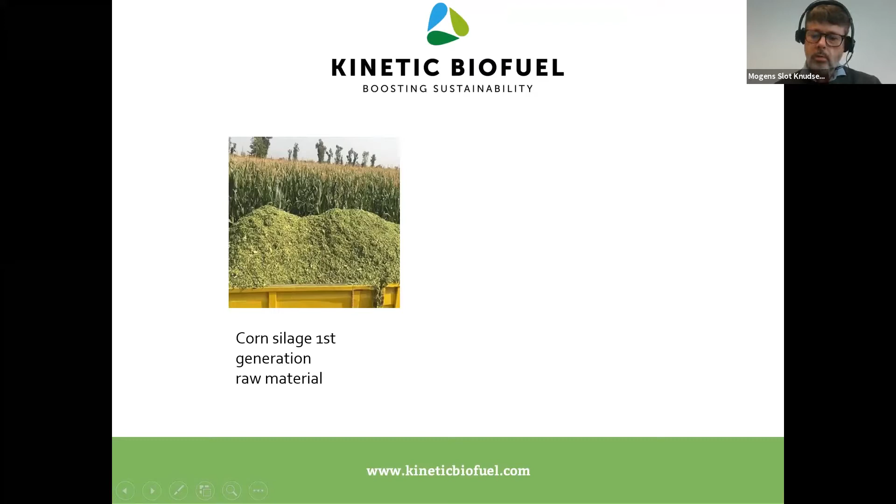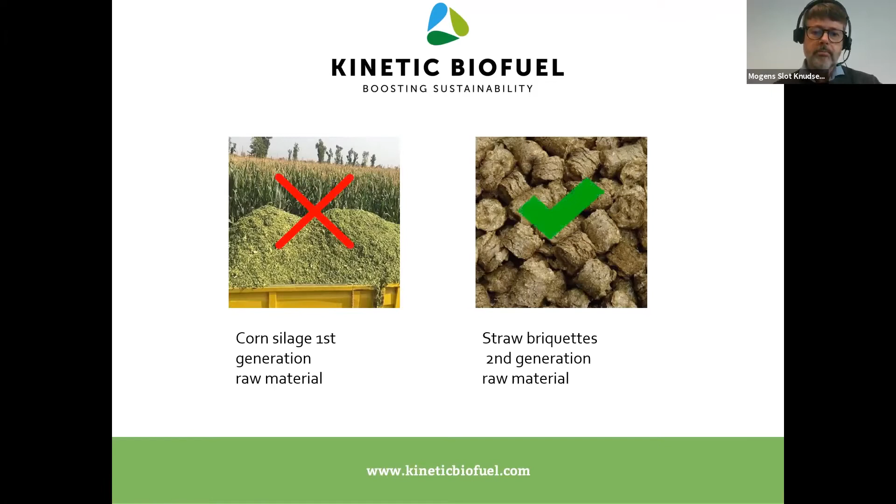So the governments are doing more to find solutions. Our solution is, of course, to use a waste material from wheat straw in the form of briquettes. So consequently, we recommend to switch from corn silage to straw briquettes. Just a little about straw in the beginning here. Everybody knows straw, primarily wheat straw, and for us to operate it, it needs to be in bales.

A bale typically weighs 150 kilos per cubic meter. Shredded straw weighs 60 to 75 kilos per cubic meter. Briquetted straw, then, 400 to 500 kilos per cubic meter. This will give some logistical advantage, which we will touch on later, but it also gives you a very big advantage in relation to your biogas operation, which we will also touch on later here.

These are some of the points we're going through. A little about agricultural residues. Craig told us how much is available in the Far East or in ASEAN countries. There's a lot available in Europe too. Which effects will briquetting have on the straw? What makes this different? And then which yields do we get from the straw? Later on, we turn to how the process is and what costs are involved. And finally, how do we operate this at the biogas plant, and a summary of advantages.

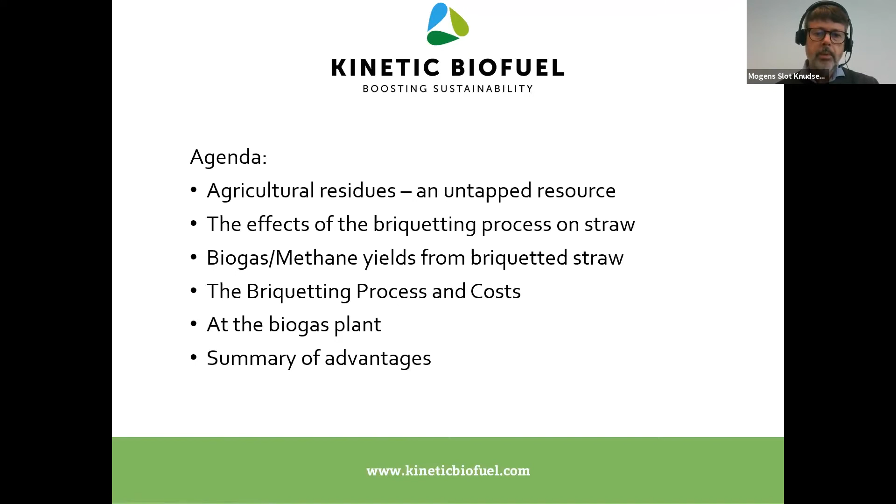Straw is a plentiful resource. Throughout Europe, we find vast quantities of cereal straw and rape straw, and it is simply sitting out there waiting for us to mobilize it and use it for anaerobic digestion, producing biogas, or perhaps advanced biofuels such as cellulosic ethanol or whatnot. The quantity is in one paper estimated at at least 150 million tons annually, and that is a conservative estimate. This is an abundant resource out there. We just need to be able to mobilize it, to manage it, and to digest it.

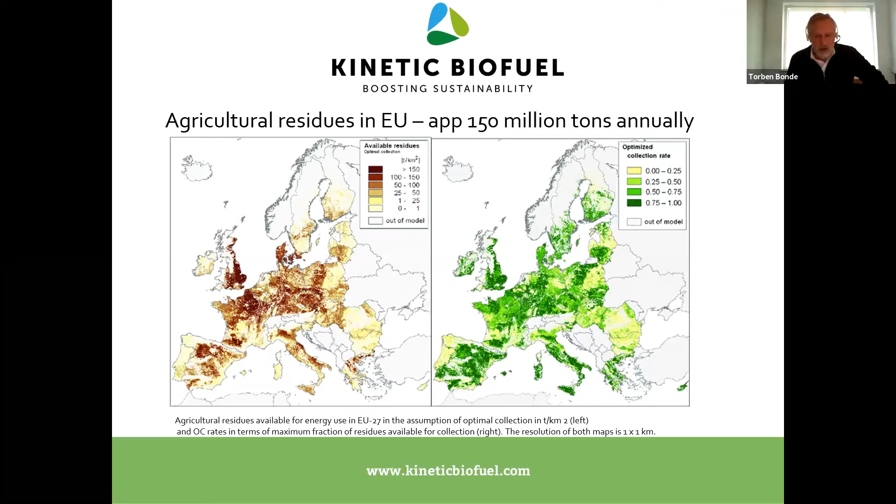Then we can, by utilizing this straw resource, replace all maize silage or energy crops, boost our biogas production and make AD a significant player in the energy market. We can replace virtually all natural gas use in Europe, etc. This resource is available to us now because we introduced this briquetting technology, which is a 3-in-1 solution. It's a logistic solution, a management solution at the biogas plants, and a pre-treatment solution that allows us not only to mobilize the straw, but to benefit from the biofuel potential. So next slide, Mogens, please.

But in order to use it for biofuel, we need to recognize what straw is and how it is constructed. On the scanning electron microscope, you see the very porous structure of straw. Straw is built to stand out in the field and withstand water, pests, bacteria, fungi, enzymes and whatnot. It's built very effectively, allowing the crop to grow in the field. But when we want to convert it to biogas, all those factors work against us. So we need to overcome that fundamental barrier that straw is highly hydrophobic, for instance.

And we do that by our dedicated briquetting technology. After straw passes our process, it is in a split second compressed by means of high pressure, 1,500 bars, and a high temperature development. It is compressed very effectively, exploding all the pores, melting all the waxes, allowing water to penetrate directly into the deep matrix of the straw.

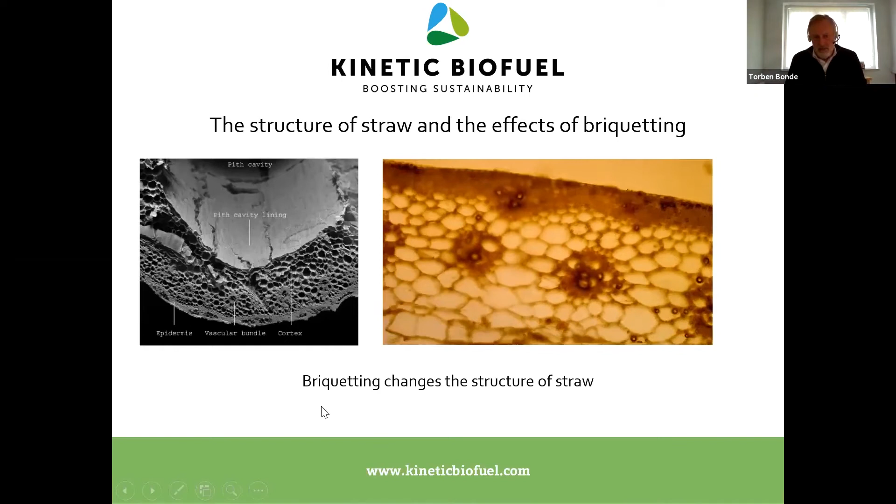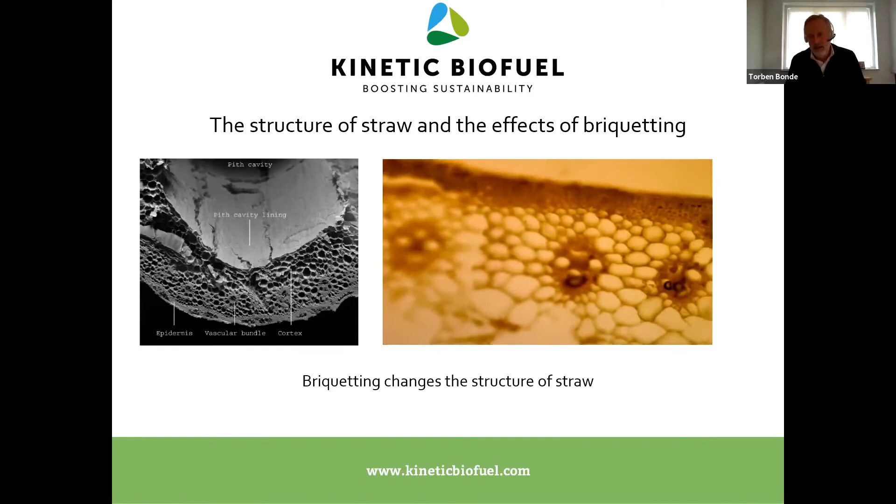We need them to be hydrophilic, as displayed here, because once it absorbs up to 10 times its own weight in water, it has the same density as water, it's easily suspended in the liquid, and it's also very easily digested into biogas. So this is phenomenal. It solves the technical issues of using straw at industrial quantities in biogas plants. The next slide, please.

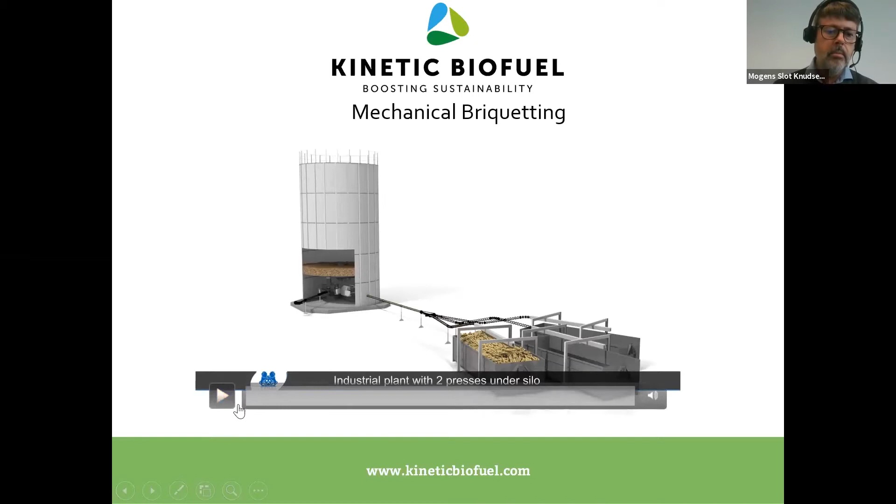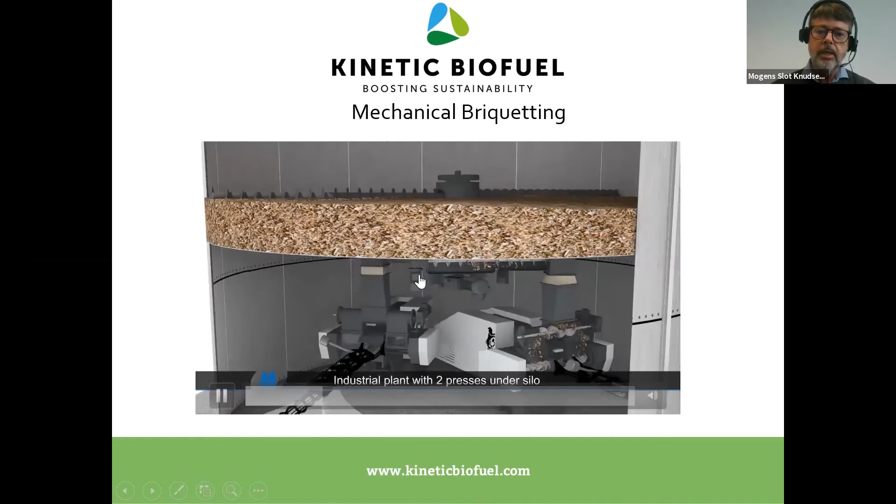Well, here I'll just take over and show you really what's happening inside the briquetting press. If you look at this video here, this is basically with wood, but it's the same principle when you work with straw. You can see the raw material is put into the press and then distributed to two compression slides that bring the raw material in front of a piston that moves about 270 revolutions per minute.

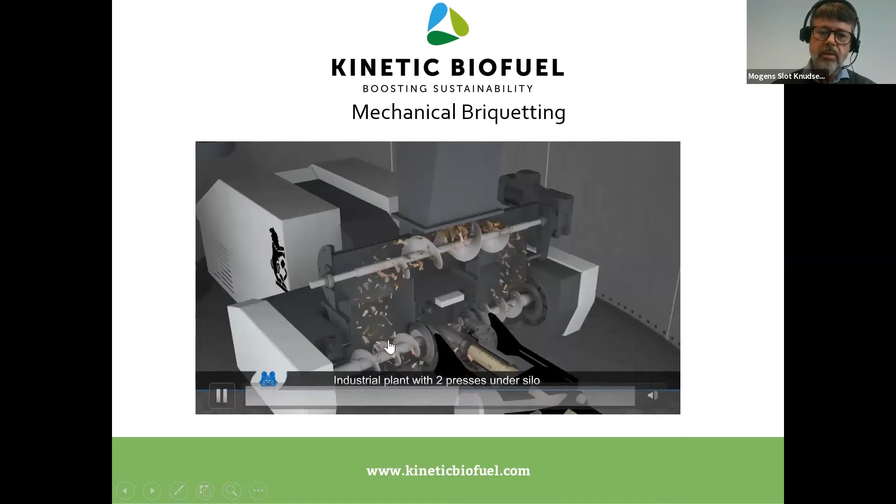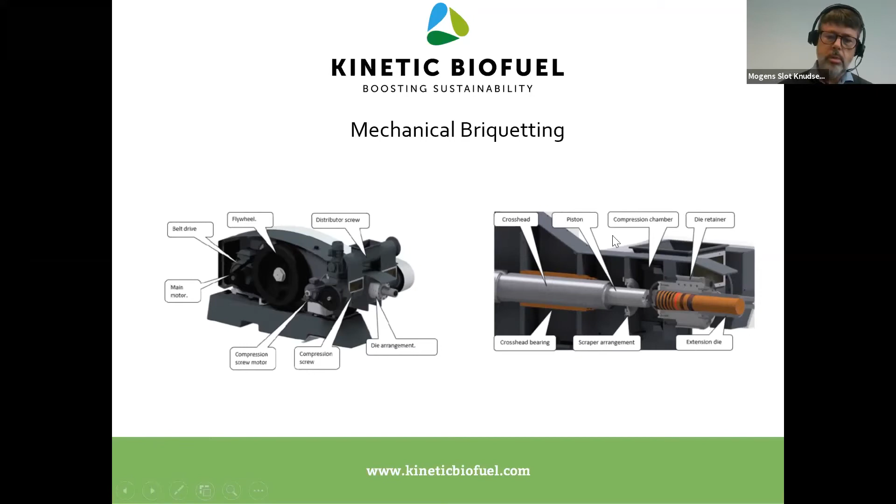This then enters the press, and what happens inside the press is, as Torben mentioned earlier, the straw goes into a conical die system, and the revolutions of the piston create high pressure. And since there's a certain amount of water left in the straw, 12, 15%, you'll get a small steam explosion which destroys the straw. So the mechanical movement, the high pressure and the heat then change the straw. Which again, Torben, maybe you can tell us a little about how this works.

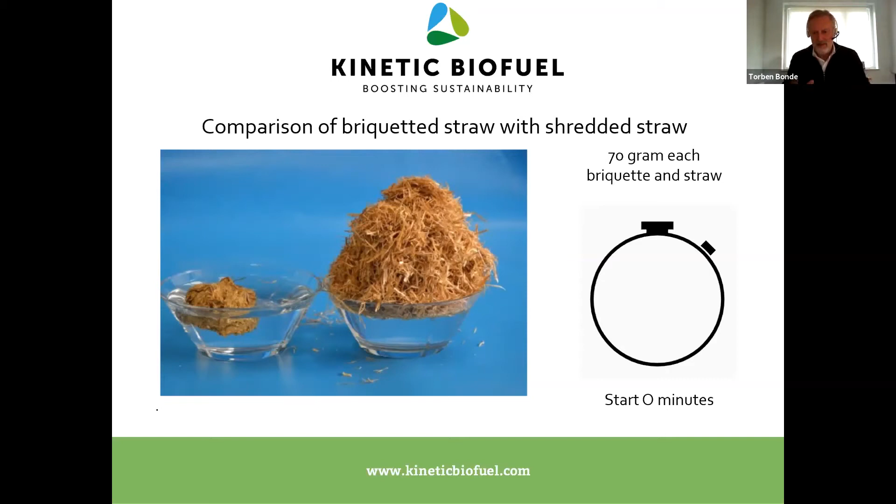This is a very simple setup that illustrates that the briquetted straw has completely changed its properties. When we start this small video, you see 70 grams of briquetted straw on the left hand, and the same quantity, 70 grams of shredded straw, on the right hand, and we just add it into a bowl of water and see what happens. So the next slide. After just 15 minutes, the shredded straw resides on top of the water, not absorbing anything, and the briquetted straw has absorbed all the water in that bowl.

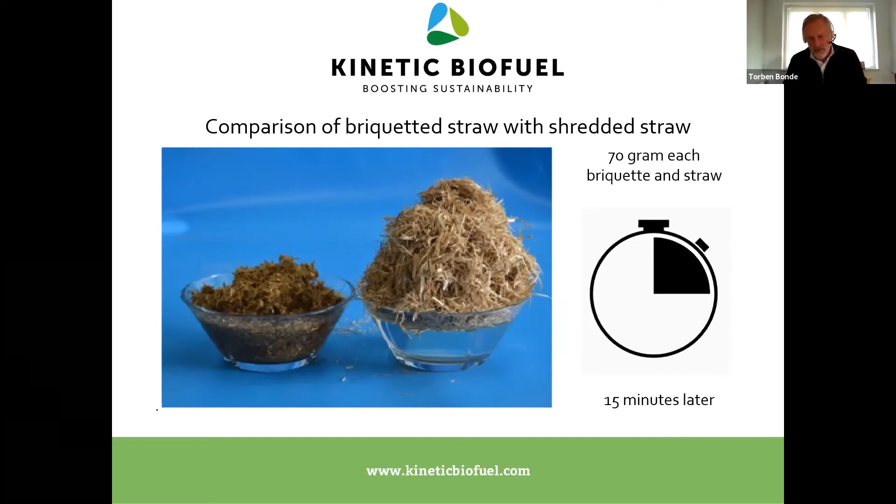And that is exactly what happens in a digester. Once we add the high density briquetted straw directly into a digester, within minutes it absorbs the water, becomes dissolved, and then is digested, giving off lots of methane. So this is simply a wonderful new phenomenon, a new quality that the briquetted straw displays here, which allows us to use straw in vast quantities. The next slide.

If I continue a little bit, in a standard agricultural biogas plant, we generally see a yield of 250 cubic meters methane per ton of briquetted straw. And when we say a standard plant, we generally mean thermophilic temperatures and residence times of about 30 to 40 days. This is not an excessive yield or underestimated. This is a robust average yield per ton of briquetted straw.

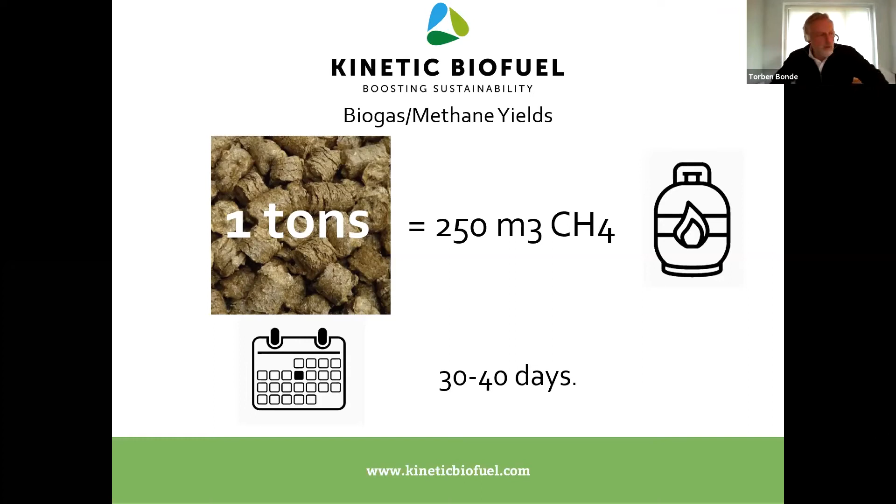In comparison, 1 ton of maize silage would give you approximately 100 or maybe 90 cubic meters methane per ton. That is because 1 ton of maize silage contains about 30-35% dry matter, whereas the straw contains 85-90% dry matter. So 1 ton of briquetted straw almost replaces 3 tons of maize silage. And based on those rough numbers, you can make your business calculation if, under your specific circumstances, briquetted straw would make sense. The next slide, please.

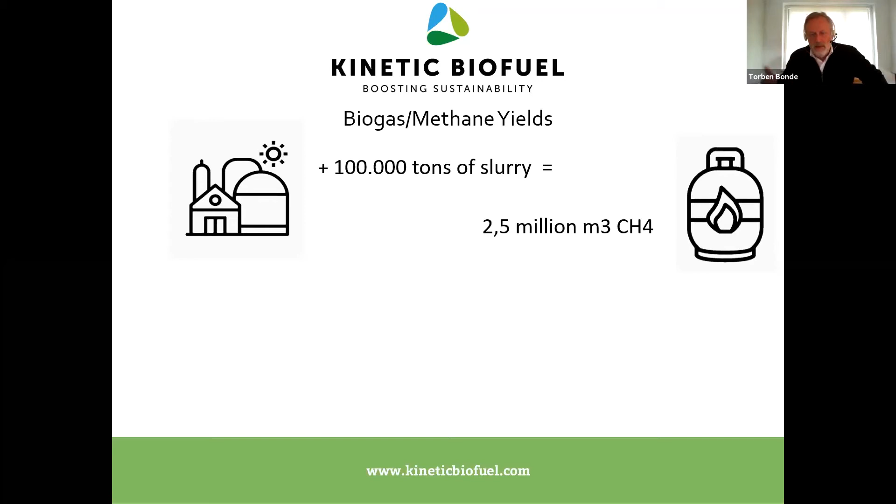This is an illustration of a typical slurry-based biogas plant, maybe 100,000 tons of pig slurry, cattle slurry, whatnot; it maybe gives off an average of 2.5 million cubic meters methane. And you go on, Mogens. And if we just add 10% of briquetted straw, we simply double the output of methane for this agricultural plant. And that is, of course, significant.

But you may not only add 10%, you could potentially add 50% of straw and double 2 or 3 more times. Then you need to do some managing and recirculation of some nutrients. But the simplest version of this is that you just add 10% of briquetted straw relative to the liquid input, and then you will at least double your biogas output, or in this case, it's calculated as methane output.

So, think about it. Sometimes I call it a divine recipe for producing biogas. Farmers have all the dilute pig slurry, cattle slurry, and whatnot, and they are also in possession of the cereal straw. The combination of these 2 substrates is simply perfect. It's a perfect match. The slurry brings in water, nutrients, biological buffer. The straw brings in the dry matter, giving off all the gas, and it works beautifully.

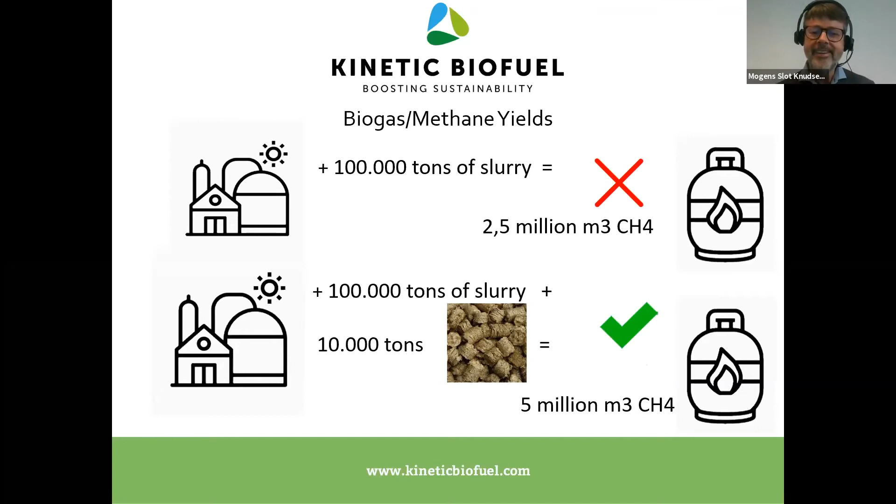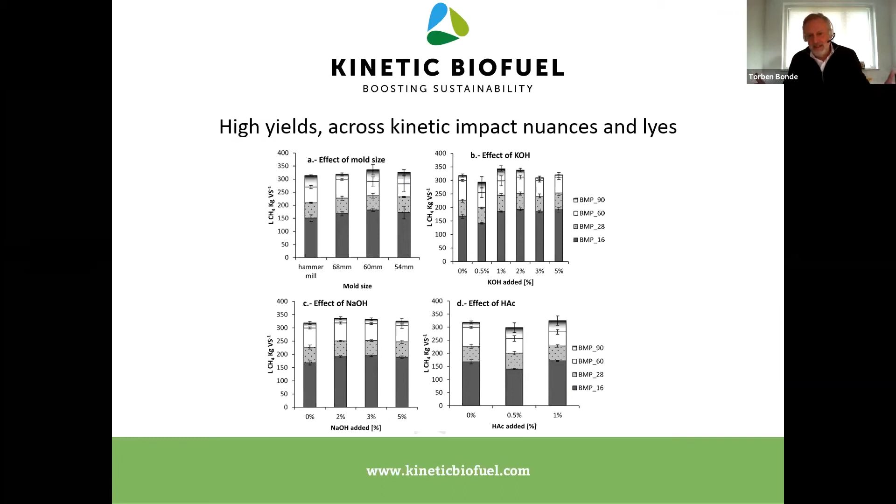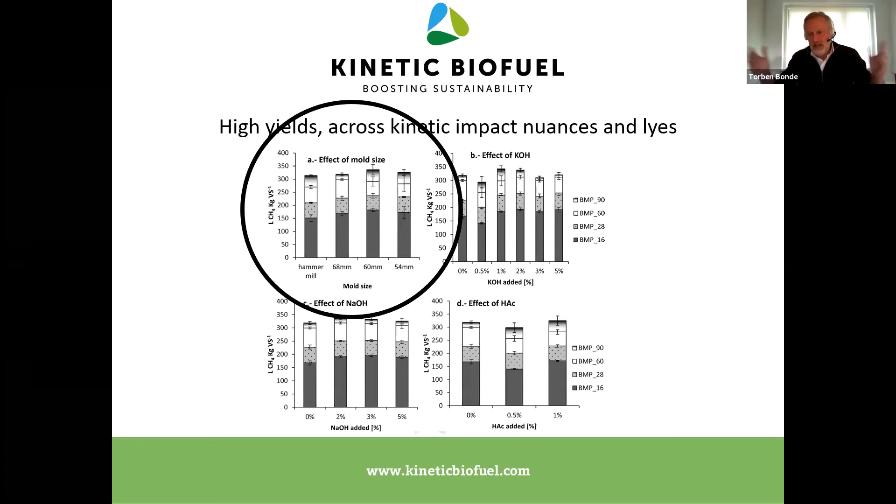When we measure the specific methane yield, we generally do that in laboratory settings. You know, you have a little bottle, then you incubate and whatnot. And when we do all that, and when we test various pressures, etc., we pretty much end up with the same potential of between 300 and 350 liters per kilo volatile solids.

And the variability is very small here, and that's because we work at a very, very high pressure. It's around 1,500 bars. If that pressure is 1,400 bars or 1,600 bars, it really doesn't matter on the outcome. So we have a very robust and simple pre-treatment technology here that allows us not only to solve the logistics and the feeding-in aspects, but at the same time the pre-treatment aspects of the straw.

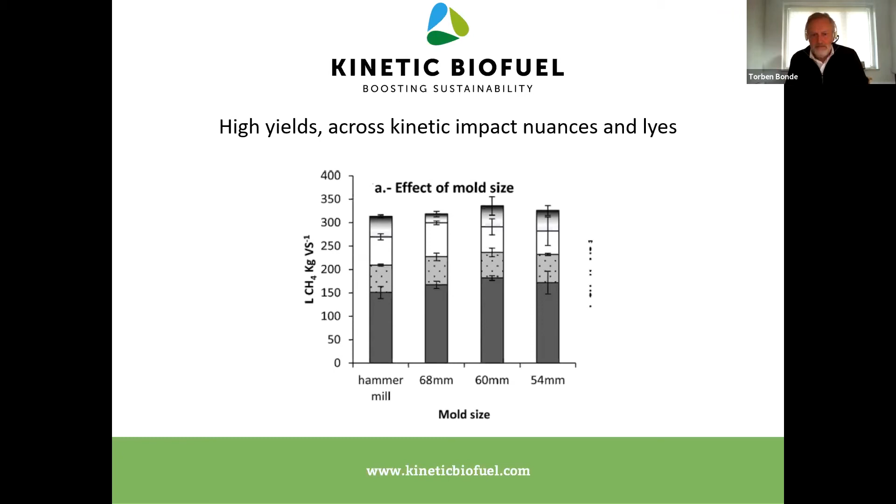So the next slide, please. We have operated all kinds of fermenters, lab scale, semi-scale, and whatnot. One of the highlights is that we operated 2 full-scale reactors completely in parallel, one with cattle manure alone and one with 9% added straw briquettes. In that scenario, we found a doubling of the biogas output and a specific yield of 351 liters methane per kilo volatile solids in this combination of cattle slurry and straw.

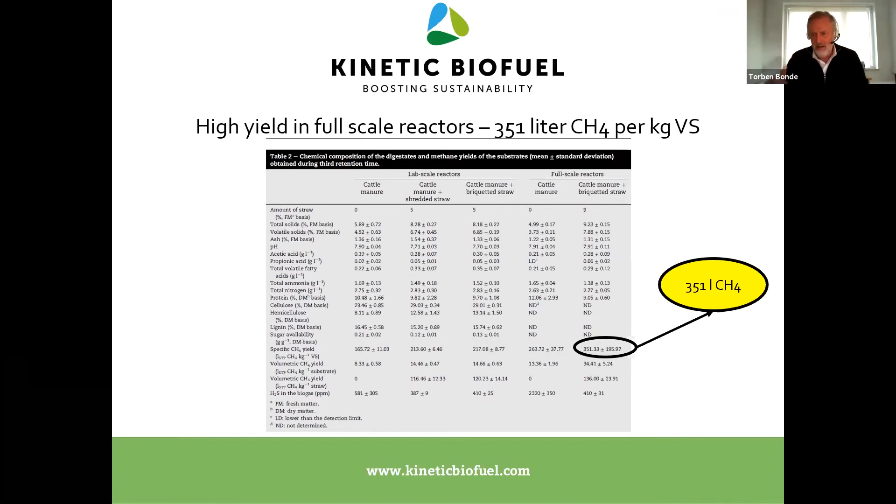So this is a perfect illustration of the potential of co-digesting various manures and other waste with cereal straw briquettes. The next slide, please. So we have talked about the briquetting process and what it brings to the AD industry. By means of this technology, we can mobilize the 150 million tons annually in Europe. We can add 50,000, 100,000 or 500,000 tons to any specific plant producing biogas or cellulosic ethanol or whatnot.

And this pre-treatment is a very important first step in converting the straw to a biofuel. As mentioned, we generally say that you can achieve at least 300 liters methane per kilo volatile solids in a standard agricultural-based digester. But the final biogas yield is very dependent on the specific type of digester you are running. There are several technologies that will increase this yield, and I have indicated some that I work with myself and implement in large industrial plants working on 300 or 400,000 tons of straw.

You can include in your digester setup a hyperthermophilic unit that pre-digests the straw at 70 degrees Celsius, and you will all realize that this temperature is an optimum for the hydrolytic and fermentative bacteria, and that really helps break down the rate-limiting step, which is that the macromolecules need to be broken down to monomers before they can be converted into biogas.

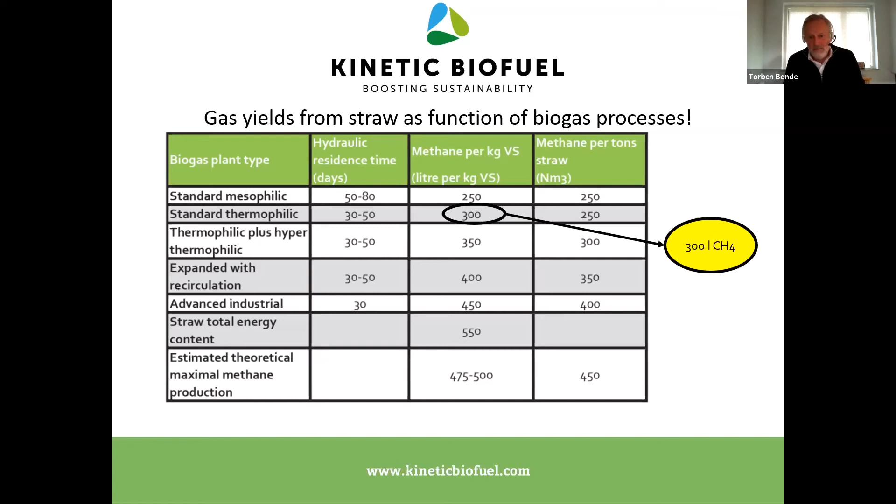The next slide, please. Yeah, and Torben, we have to move a little faster. I think, Leanne, you have to help us if we are running out of time. No, you're still good. You've got another 7 minutes yet. Okay, good. We still have to show you a little video from an existing plant. So.

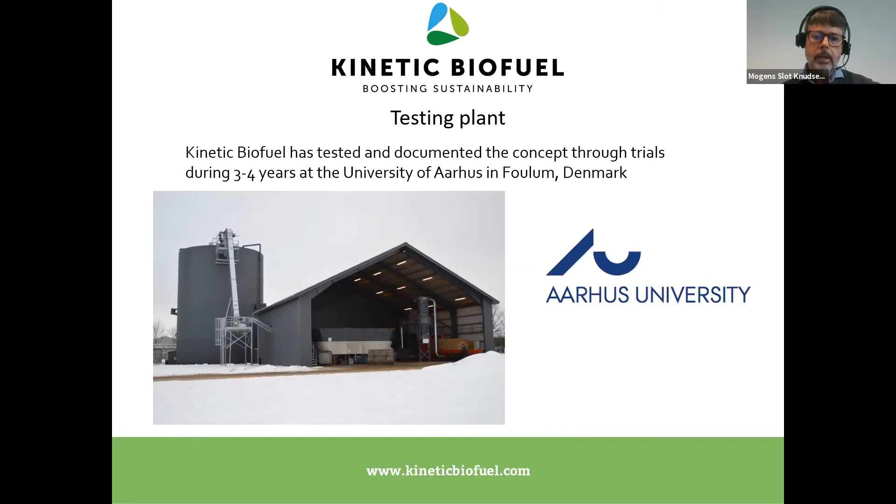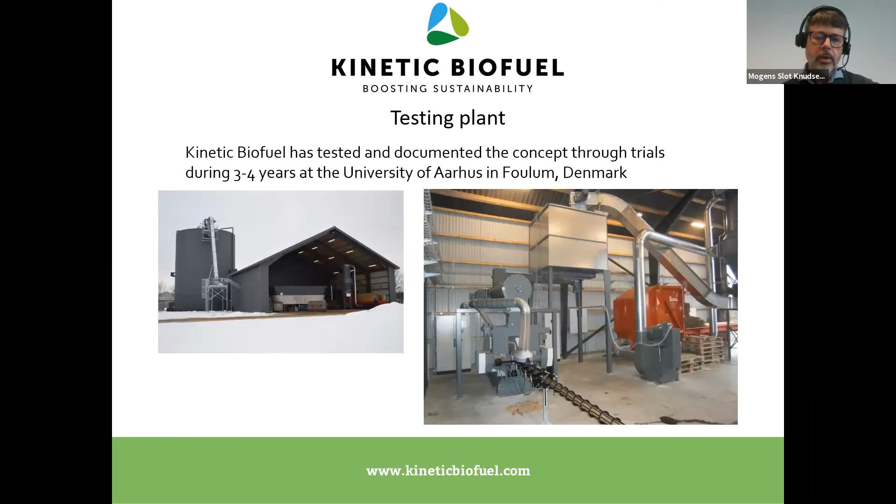Go ahead, Mogens. Yeah, here you see where we have tested this. We tested at the University of Aarhus in Foulum, where they have a reactor, for 3 or 4 years. And here's the plant. I'll show you a larger plant later, but what we did here was an 800 kilos per hour plant, running it for 3 or 4 years.

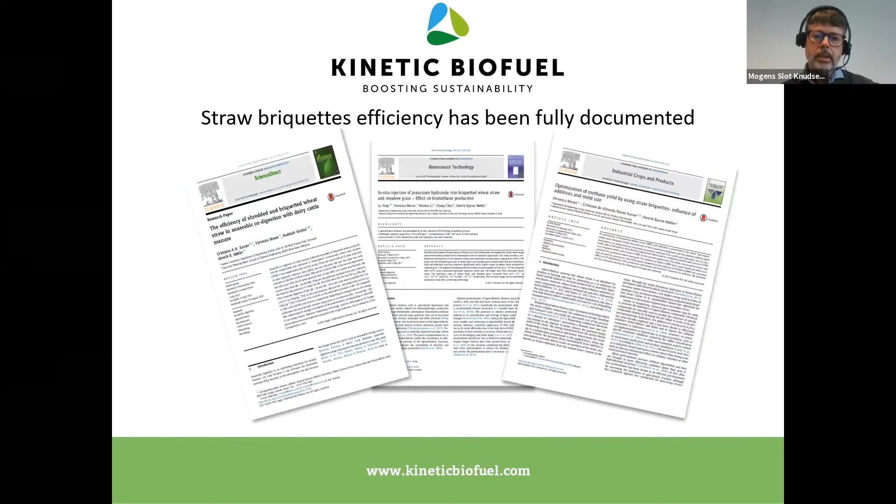All this is documented. Several PhD students and professors have been working on this, and papers are available. Here are some of them. We will not go too much into detail on this. But let's get a little into the process so you understand what it involves. It does not only involve a briquetting press.

What's important using especially wheat straw and other types of straw is the moisture of the straw. This is key to operating a briquetting plant, and it should be around or below 15%. You need to shred, mill, and clean the straw. And here you see a straw shredder where we shred the straw, or take the bales apart, remove the strings, and then most importantly, we remove stones. So we have a stone trap. All bales are full of impurities and many stones.

Afterwards, we enter the hammer mill where we get the straw down to 20 to 30 millimeter length, where it passes through a cyclone filter and into a mixer, kind of a buffer mixer, which is some kind of a silo. You cannot put straw into a normal silo. It has to be moved all the time.

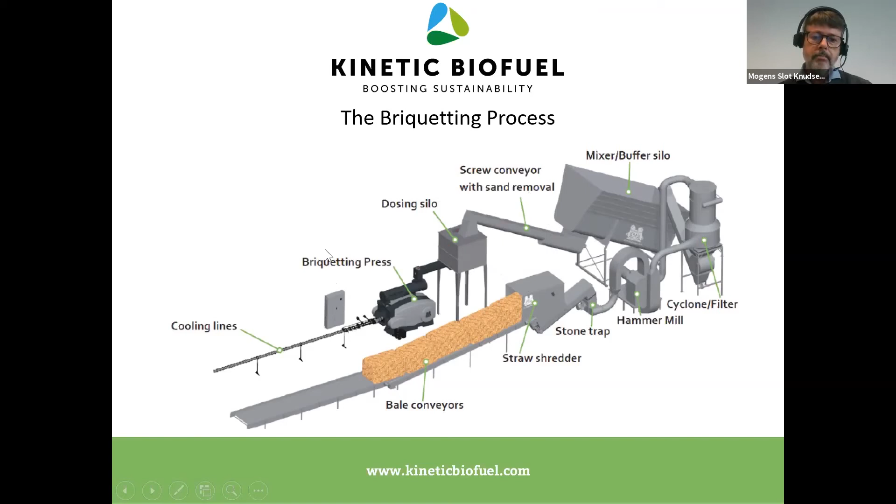If the straw contains sand or small impurities, we can remove that. It's important to remove all these things. Part of them, big particles before the hammer mill, and small particles also before the briquetting press. Sand and stones and so on are high wear on the press, so we prefer not to see that. But this is a typical operation of a straw plant.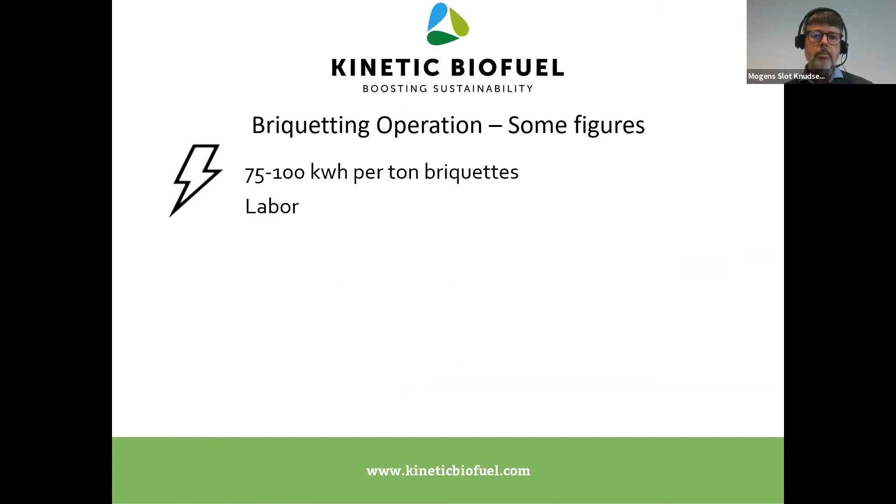Just to give you some figures, the most important thing or cost is power. So we use about 75 to 100 kilowatt hours per ton of briquettes produced. Labor, I write here 1/4 of a person to 1 person per shift. It depends on the size. If you're operating 5 presses, you don't need much more people than operating 1.

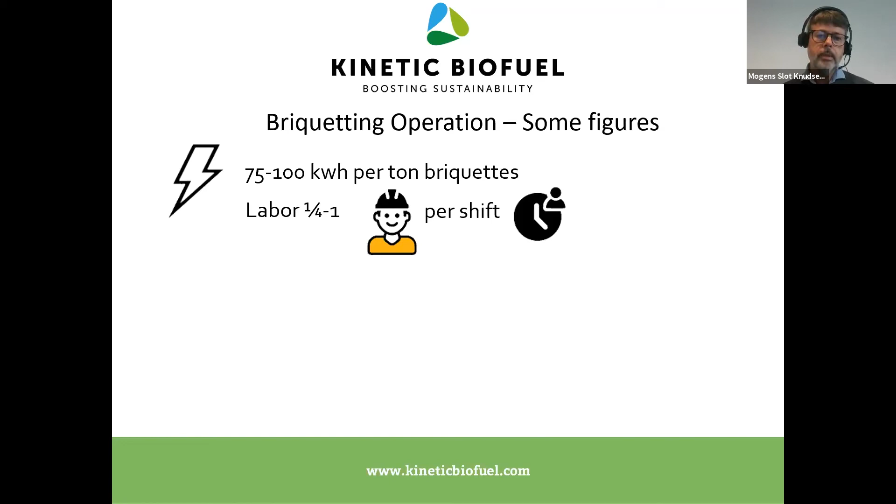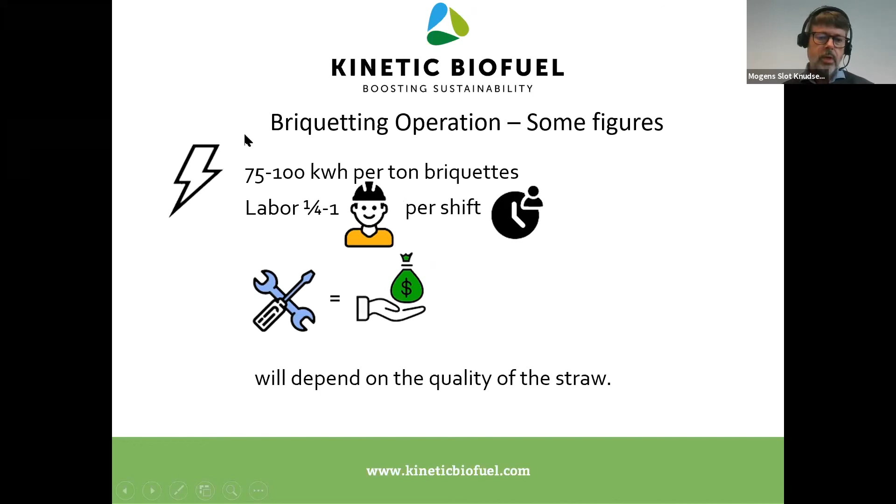Maintenance costs, spare parts are of course an item which will depend on the quality of the straw. If the straw is clean, then the whole operation, depending on the cost of local labor and power, will be about 25 to 30 euro per ton.

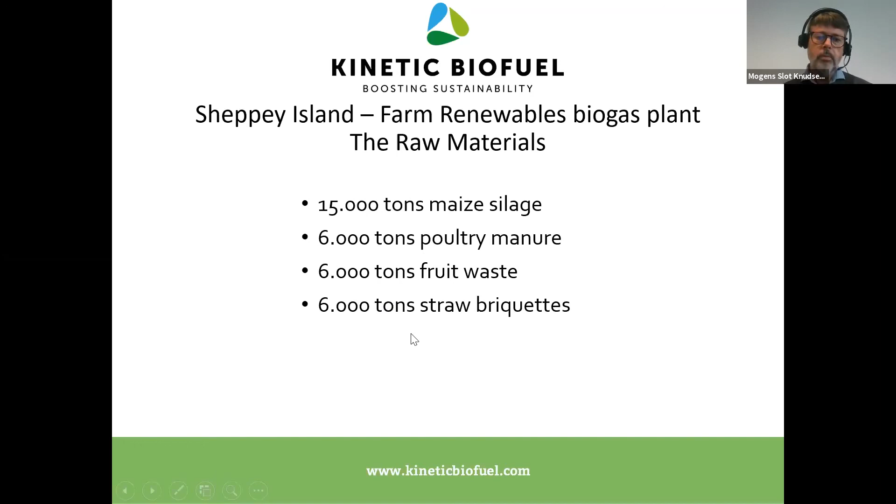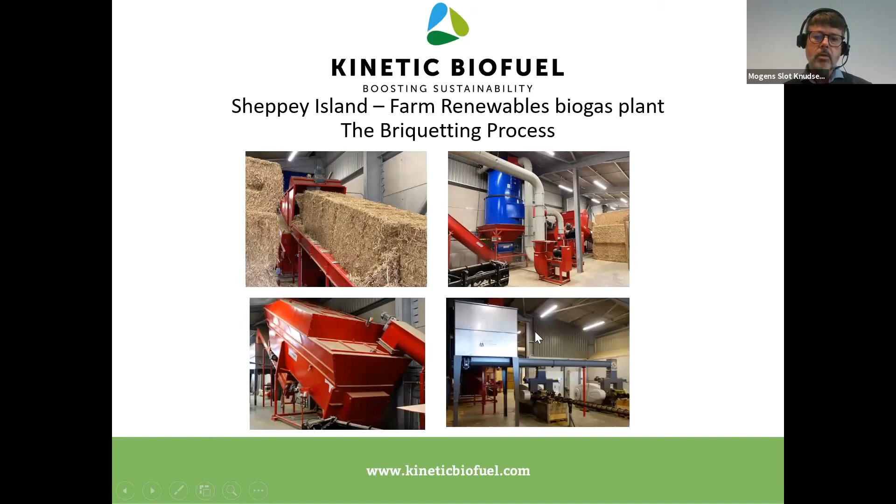We'll show you an example from the island of Sheppey, where we have installed a briquetting plant together with a new biogas plant. This plant uses 15,000 ton of silage, 6,000 ton of poultry manure, 6,000 ton of fruit waste, and then 6,000 ton of straw briquettes. Of course, the straw briquettes have a lot higher dry value or volume than some of the other parts. Some pictures, shredding operation, filter, mixer, and so on, but I think it's better for you to see this on a video. So we should be able to show that here.

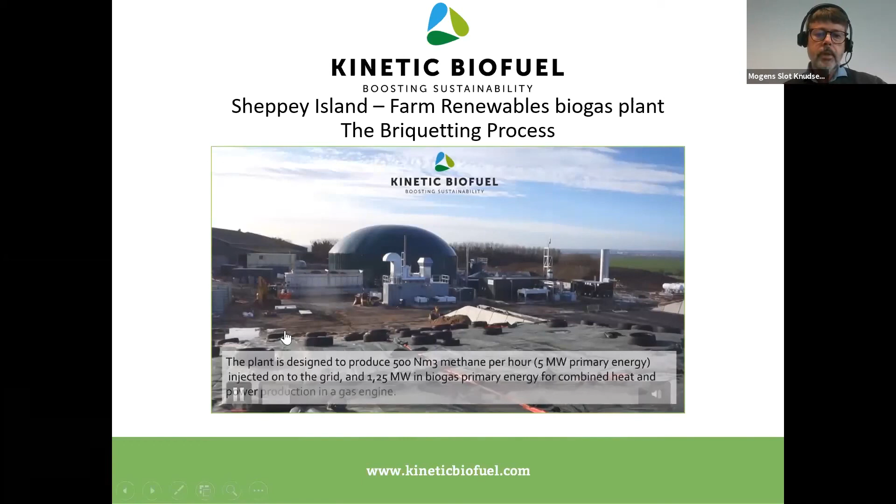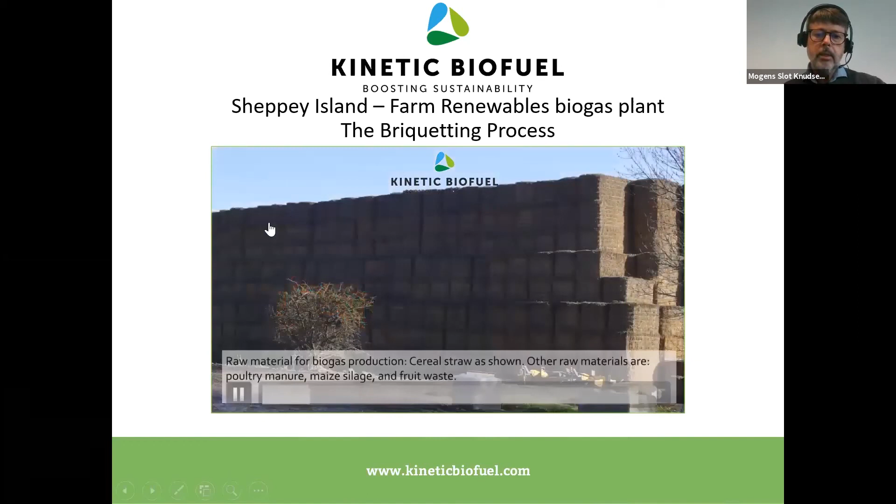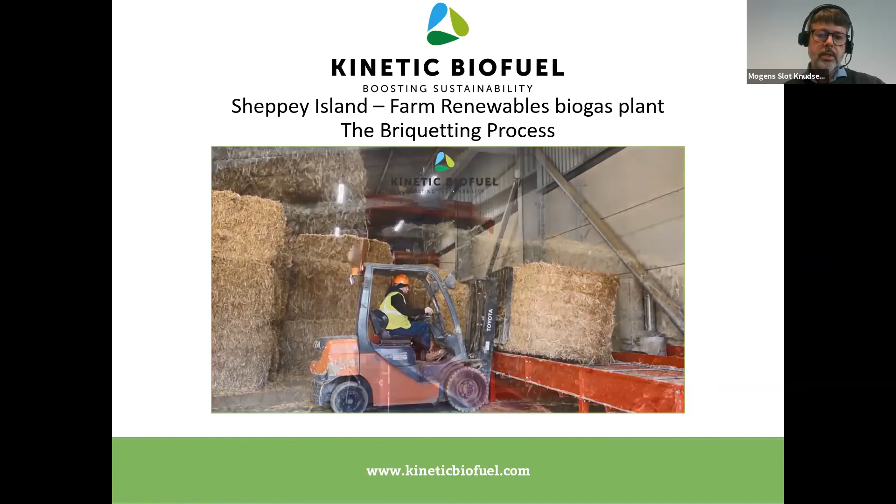Here you see the Sheppey plant. It was all new, so it probably looks different today. It was started late last year, and we have been operating the briquetting plant since then. Again, this is a 3D view of the plant. They have plenty of straw on the island. This is kept outside. Here they load the bales onto the pre-shredder or the shredder. They remove the strings, and then the straw is shredded in the shredder.

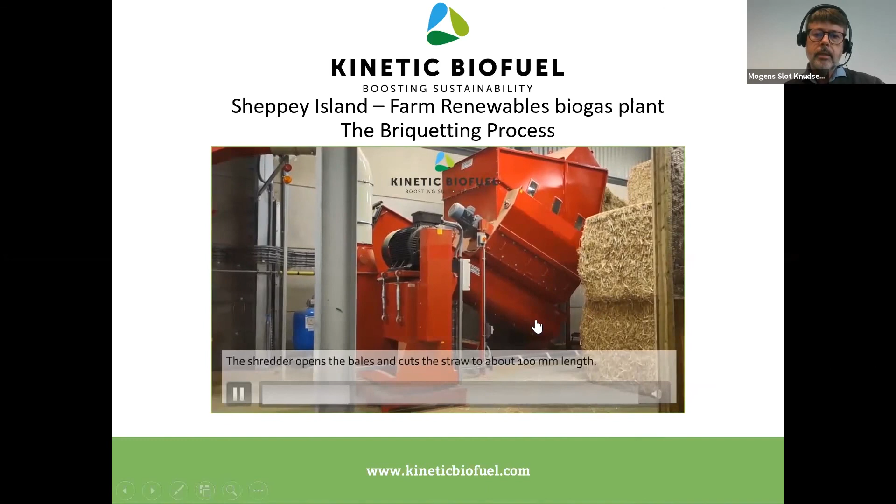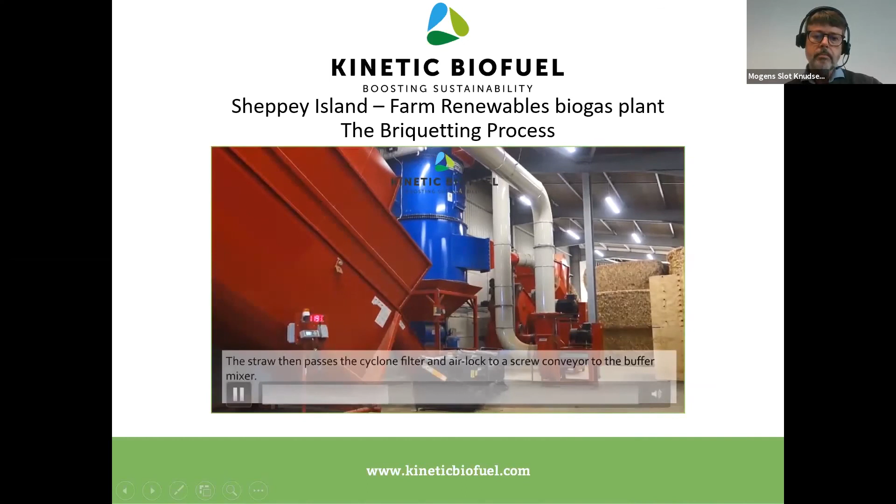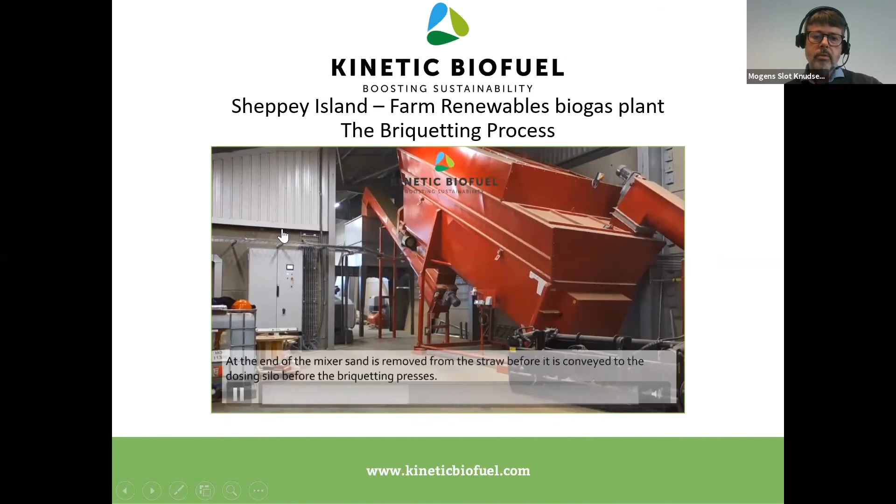This is a shredder seen from the other side. This is working on demand. The plant will call straw when it's available. Here's a stone trap. Most importantly, we remove stones before we get into the hammer mill, and then from the hammer mill through the filter into the mixer. The mixer, as I said, is a silo. In case the shredding operation stops, the briquetting presses will move the same. If the briquetting press should stop for a short while, the rest of the operation can move.

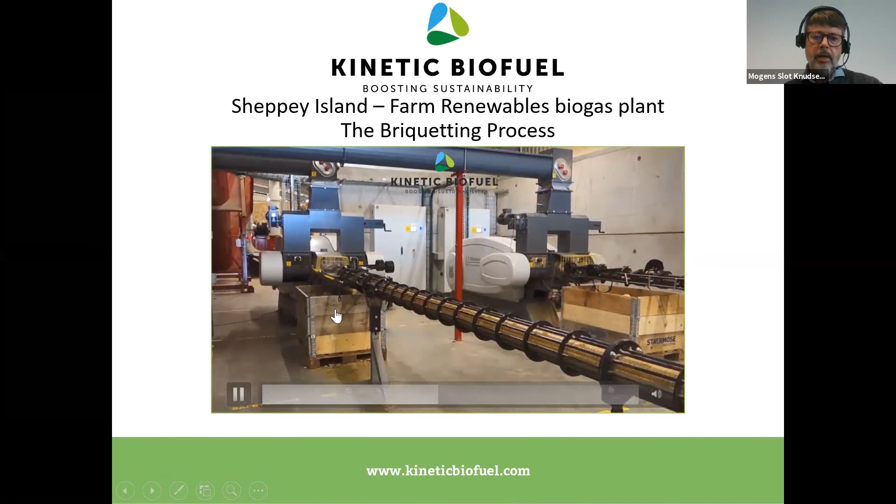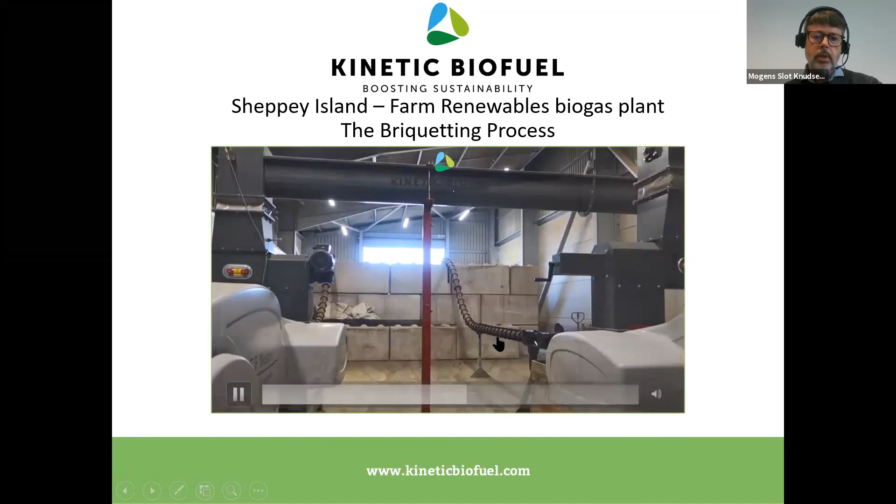Here we have two presses. On Sheppey, they run 3.5 ton in total. We normally guarantee 1.5 tons, so they do well. What you can see here is just water vapor from the press. And the briquettes are then let out on cooling lines. It's both transport and cooling. And here they fall down. The briquettes are soft. We can make them hard or soft, but for biogas operation, it's right to have a soft briquette.

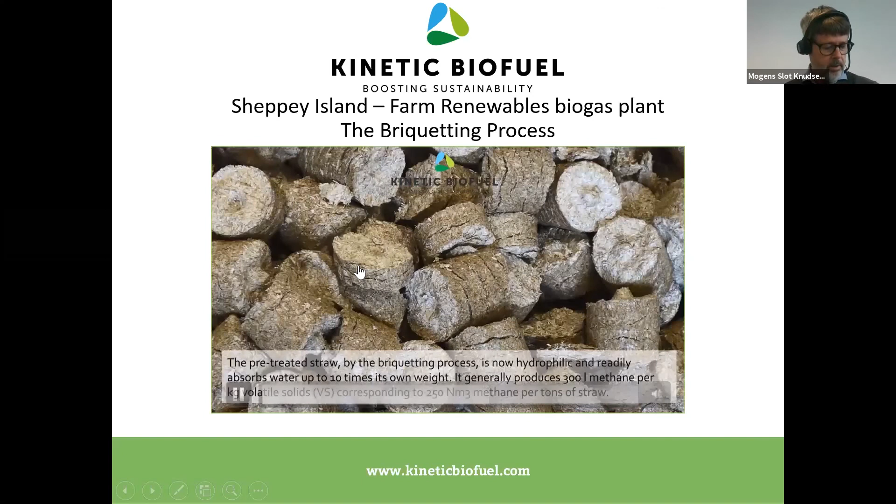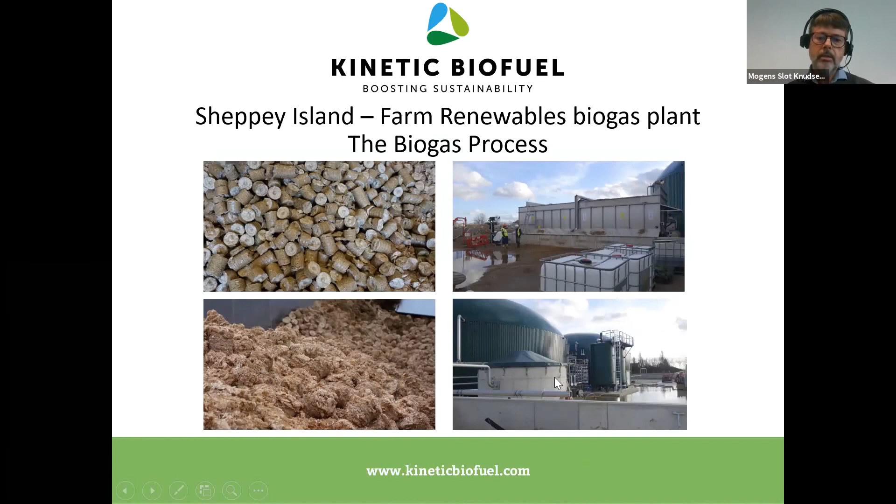So let's stop here and move on to the last couple of slides. Well, what they do here, they introduce the briquettes in a big mixer. It mixes all different kinds of raw material together, and then pumps it in together with silage into the biogas reactors.

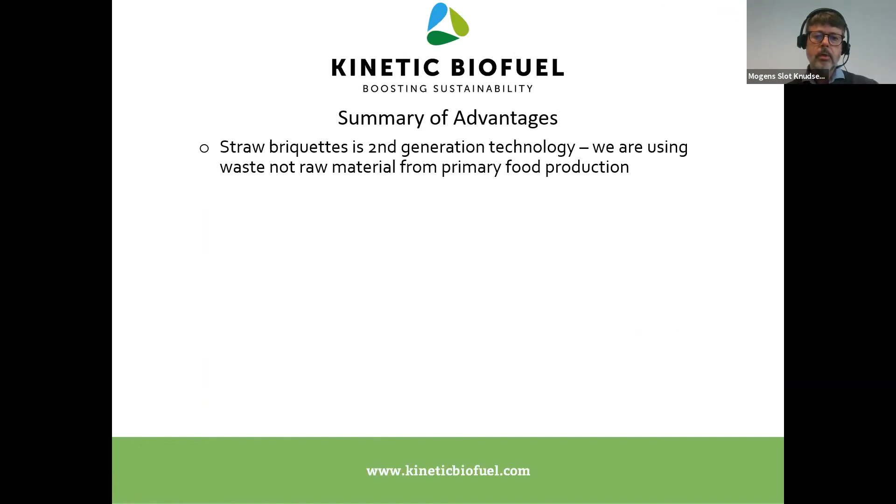Let's just sum up some of the advantages. I think we are very close to running out of time, but as we told you earlier, it's a second generation technology. The tendency is that we'll move away from first generation and into second generation. So this is a good aspect. The straw briquettes absorb 7 to 10 times more than shredded straw. We have potential customers that have tried to introduce shredded straw into the digester. This is not possible because physically it will not absorb, and it cannot be introduced into the reactor.

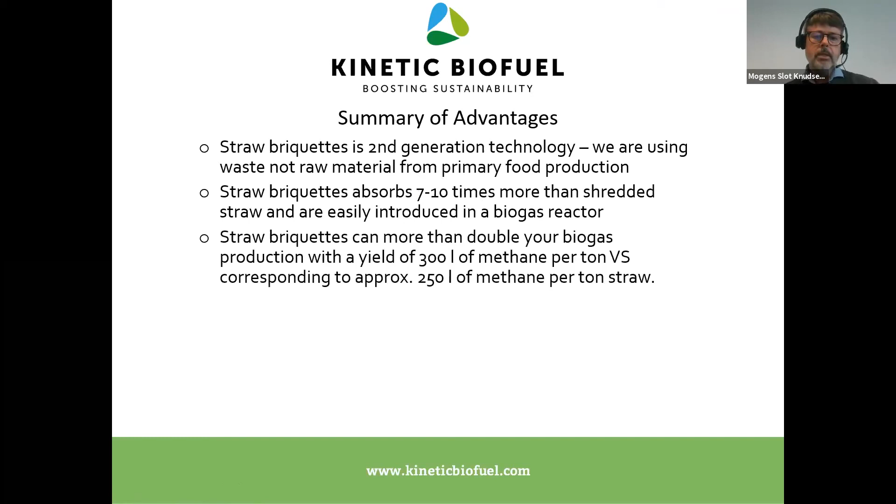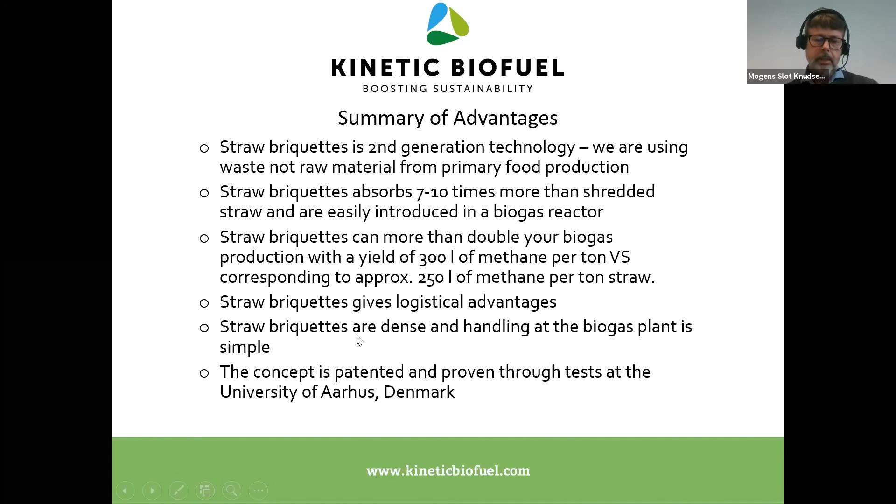Again, as mentioned, we generate 250 liters of methane per ton of straw. And it gives you logistical advantages. If you have the briquetting operations away from your biogas plant, well, it's not very expensive and easy to move around. They are dense and easy to handle. We have patented this and documented this through a cooperation with the University of Aarhus in Denmark. And then finally, as mentioned in the beginning, there's plenty of straw.